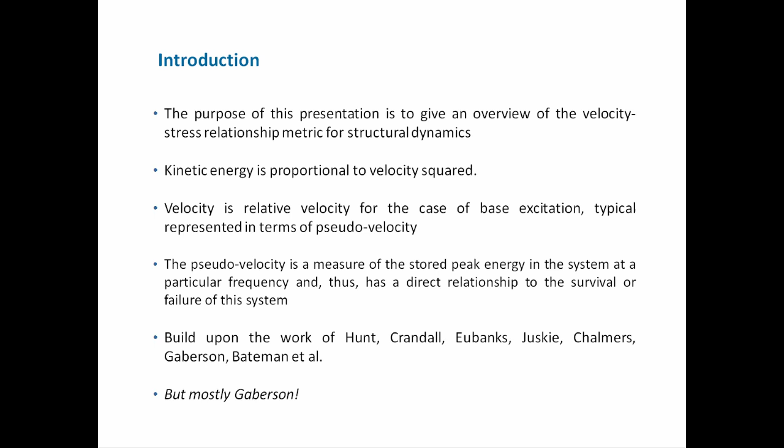This unit builds upon the work of Hunt, Crandall, Eubanks, Juskie, Chalmers, Gaberson, Bateman, and others, but most particularly Gaberson, who was the champion of this method. Here's Dr. Howard Gaberson, who passed away in 2013. I had the privilege of being with him on two different occasions.

He was a shock and vibration specialist with more than 45 years of dynamic experience, and he was with the U.S. Navy Civil Engineering Laboratory and then later with the Facilities Engineering Service Center from 1968 to 2000, mostly conducting dynamics research. Gaberson specialized in shock and vibration signal analysis and published more than 100 papers and articles.

Many of these papers concern the pseudo velocity and how, according to his claims, and they're very good claims, pseudo velocity is the best metric for representing shock response spectrum. He also wrote papers on the stress-velocity relationship.

So here's some of the seminal references. F.V. Hunt wrote 'Stress and Strain Limits on the Attainable Velocity in Mechanical Systems,' published in the Journal of the Acoustical Society of America in 1960. S. Crandall wrote 'Relation Between Stress and Velocity in Resonant Vibration,' also published in the Journal of Acoustical Society of America, in 1962.

And Gaberson and Chalmers wrote a paper called 'Modal Velocity as a Criterion of Shock Severity,' published in the Shock and Vibration Bulletin by the Naval Research Lab in December of 1969. There's also a textbook written by Clough and Penzien called Dynamics of Structures.

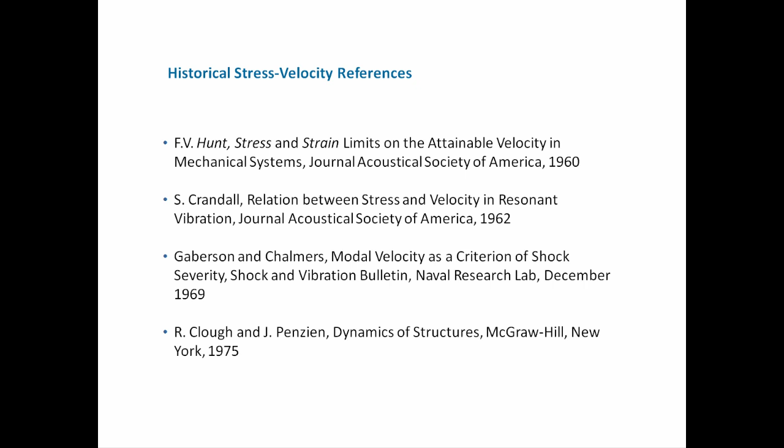Here's an infinite rod, vibrating longitudinally. We're going to consider the longitudinal stress velocity for a traveling wave along this infinite rod. There are various zones where you see dark gray turning into black - that's where compression is taking place. The lighter areas, almost turning into white but not quite, that's rarefaction, where the particles are being spread apart. In this case, the direction of travel is from left to right. There's a well-known relationship between the stress and the velocity for this case.

Sigma is the normal stress, and it's a function of both space and time. That's equal to minus rho c times the velocity at a given space and time. Rho is the mass density, c is the speed of sound in the material, and v, the velocity, is the particle velocity at a given point and also at a given time.

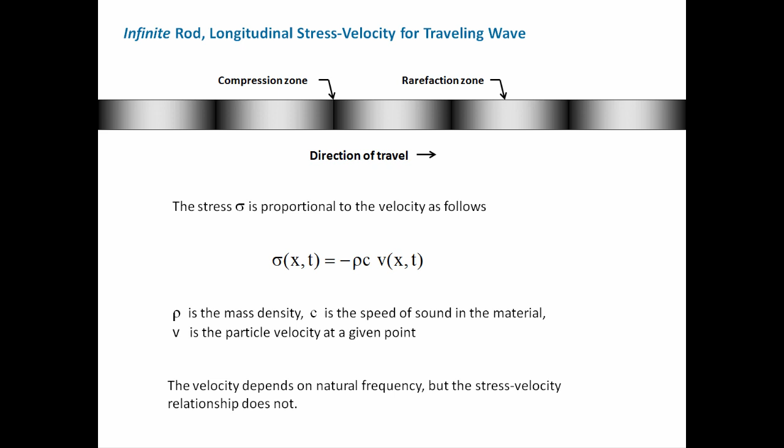One of the reasons this relationship is so attractive is that frequency is not explicitly part of that equation. But of course, if we were to analytically calculate the velocity, we would need to calculate the frequency. Or another way, if we were setting up an experiment, we could experimentally measure velocity. This simple stress velocity relationship becomes the basis of everything we're going to do from here on out. So here's another case.

Again, we have a longitudinal rod, but in this case it's a finite length with fixed boundaries on both the left and right. So the waveform is traveling and being reflected, and potentially those reflections could set up into a standing wave.

And for this case, we have a similar equation to what we've seen before, but slightly modified. In this case, we have sigma sub n, so this is the modal stress. Just for simplicity, let's assume that only the fundamental mode is being excited and that all the stress is in that fundamental mode response.

And when I say excited, we could have the case of zero damping, an undamped system, where there was an initial velocity and initial displacement that set up a resulting waveform at the natural frequency. Or we could have some sort of applied force, even base excitation, driving the system into resonance.

So that normal stress, it is a normal stress, and sub n actually is referring to the mode number rather than normal. The maximum modal stress is equal to rho c times the modal velocity maximum.

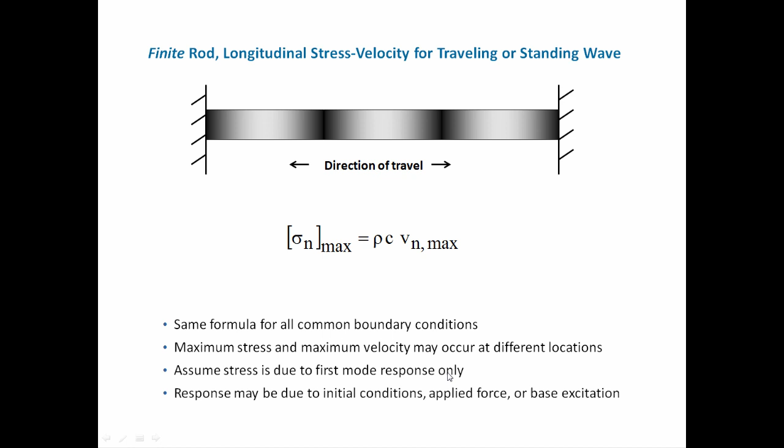Let's just review bullet 3. We're going to assume the stress is due to first mode response only. Later on, we'll consider the case of multi-degree of freedom response.

Okay, so here we have a beam bending, and let's think about the stress-velocity relationship for beam bending. In this case, the maximum bending stress is equal to c hat. Now, c hat is the distance to the neutral axis.

Then we have the square root of the elastic modulus, E. A is the cross-section area, rho is the mass per volume, and I is the area moment of inertia. So effectively, these terms together equal a constant, and that constant depends on geometry and material properties.

So the maximum bending stress then is equal to this composite constant times the maximum modal velocity. And again, the maximum stress and maximum modal velocity may occur at different points.

And for right now, we're still being simple and assuming that the stress is due to the first mode only. In other words, the response of the beam, even though it's a continuous system, is just in its first mode, its first bending mode.

And this formula will work for a variety of different excitation sources, including initial conditions like initial displacement, initial velocity, or applied force or base excitation.

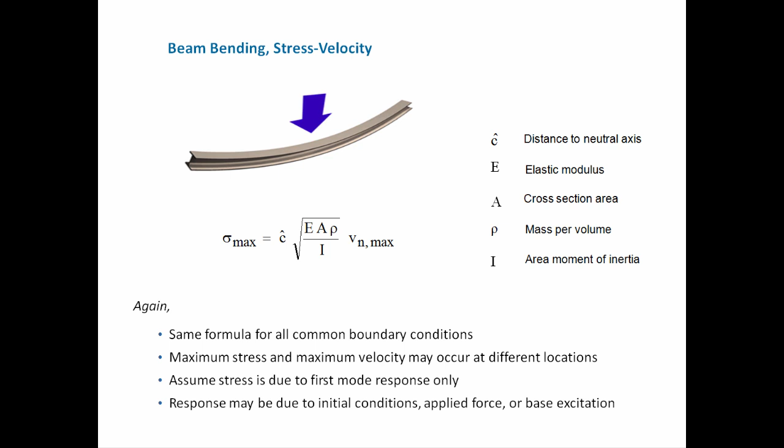Plates are more complicated, and actually in an upcoming unit we're going to go over a kind of a simplified way of analyzing the plate bending stress-velocity relationship.

But going back to the seminal 1960 paper by Hunt, he wrote: 'It is relatively more difficult to establish equally general relationships between antinodal velocity and extensional strain for a thin plate vibrating transversely, owing to the more complex boundary conditions and the Poisson coupling between the principal stresses.' But he did come up with a formula for higher modes for an intermodal segment.

So imagine there are a series of nodal lines sort of crisscrossing this rectangular plate, and he came up with a formula where, for some higher mode where there's just a patch between these nodal lines, we can come up with a formula for the stress and velocity relationship for that patch.

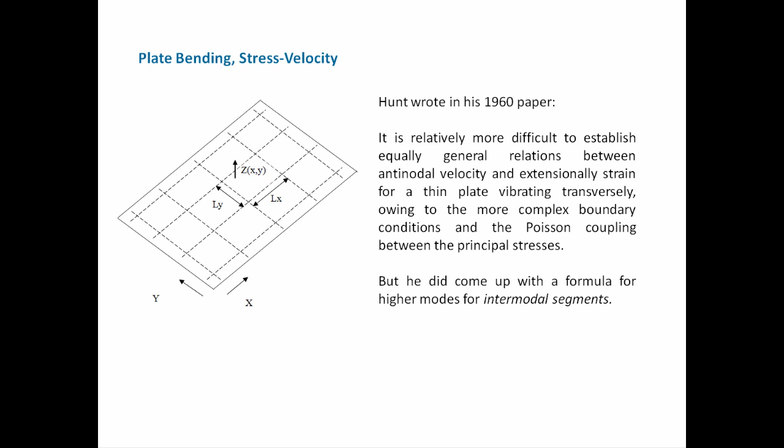And we'll maybe talk about that more later, but actually we're going to use a simpler method. I just wanted to mention this because it's in Hunt's 1960 paper.

So we can generalize this into a formula here where we have the maximum stress for modes, and the sub-n refers to the mode number, is equal to K. Now K is a constant of proportionality. We'll talk about that here shortly.

Rho C—by the way, I think rho C has some other names. I think it's sometimes called the specific impedance or the acoustic impedance, and you can fact check me on that. And then we have the maximum modal velocity, V sub n.

So this K factor here, now let's consider we have some complex structure. It could be an assembly of plates and beams or cylindrical shells, whatever. This K value, the constant of proportionality which depends on geometry, according to Bateman could vary from 4 to 8.

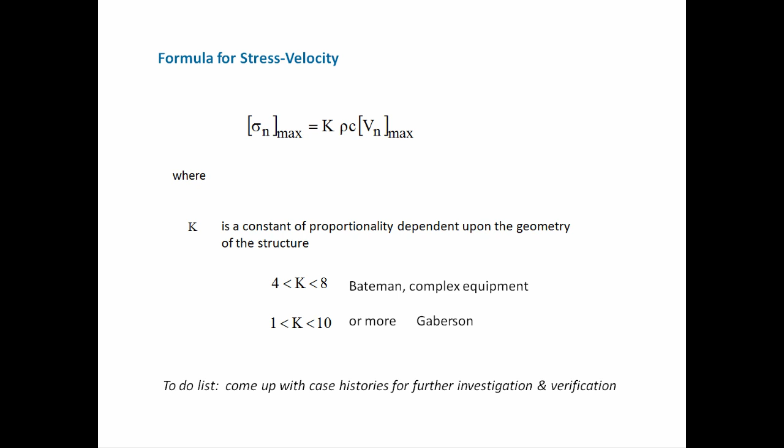And Gaberson was more conservative, and he said that K value can vary from 1 to 10. I have a note to self, a to-do list, to come up with case histories for further investigation and verification. Or if anyone else needs a project, you can go ahead with that and see what you come up with.

We've talked about Mil Standard 810E before. Now, I realize Mil Standard 810 has been revised to Rev F and G, and I think H is in the works. But anyway, going back to Mil Standard 810E, there was an empirical rule of thumb stating that a shock response spectrum is considered severe only if one of its components exceeds the threshold.

The not-to-exceed threshold is 0.8 G per hertz times natural frequency in hertz. This formula should look familiar to you. We've actually covered it before when we were talking about shock response spectrum, and now it's time to revisit that rule of thumb and build upon it.

So let's say, for example, we had 100 hertz natural frequency. That was the natural frequency of our component. The severity threshold would be 80 Gs.

This rule is effectively a velocity criterion, and Mil Standard Rev E stated that it is based on unpublished observations that military quality equipment does not tend to exhibit shock failures below a shock response spectrum velocity of 100 inches per second. Well, if you actually work through the mathematics of that formula, that actually corresponds to 50 inches per second. So there's a built-in 6 dB margin of conservatism.

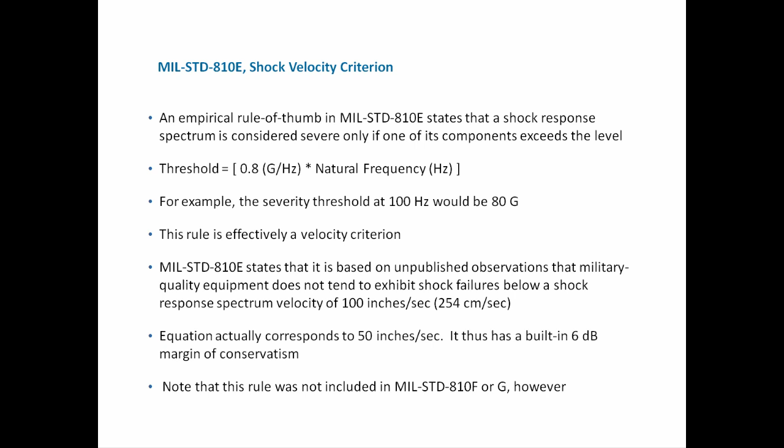Another, probably a little better way, or maybe I should say just a supplementary way, is to see whether the random vibration environment is high enough to cover your SRS shock requirement. We'll talk about how to do that in an upcoming webinar.

So imagine you have to take 2 cylinders and connect them together. These could be modules in a launch vehicle, and there's a joint between those 2 cylinders, and the V-band clamps that joint down so the 2 cylinders are fastened one to another. This would be like in a launch vehicle.

So during the portion of flight when it's time to separate the 2 modules one from another, there might be some cartridges. These cartridges have a little pyrotechnic charge inside, and the charge is set off, and it drives a guillotine blade, and the guillotine blade cuts the bolt that connects the clamps together.

And when I say that, there could be several bolts at a given azimuth or clocking angle, as well as between other segments as well. So there could be 2 or 3 or 4 bolts, whatever, cut in order to have the V-band release.

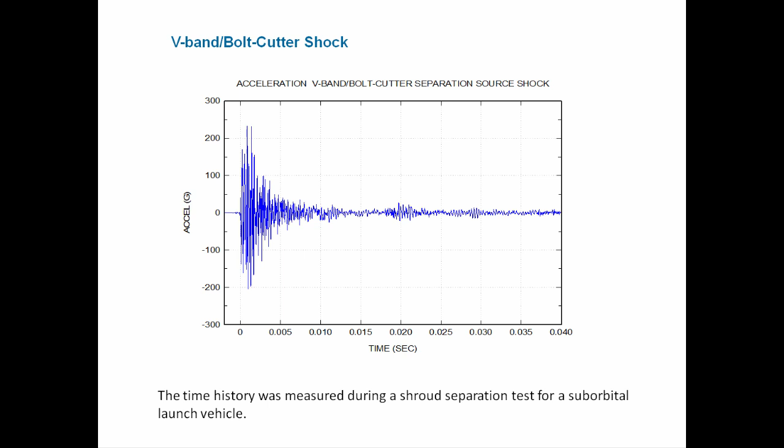Now pseudo velocity is a slightly fuzzy term. So when we say pseudo velocity, it's sort of the approximate relative velocity. But let's just remember, when we use pseudo velocity, we're engineers. We're not physicists.

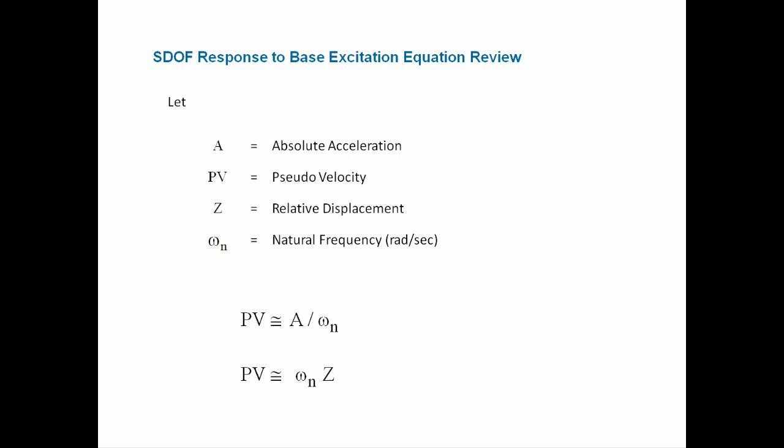But let's look at the peak velocity. Well, the peak velocity is within about 12 inches per second, and 12 inches per second is well below the conservative 50 inch per second threshold via that empirical formula we took a look at earlier. So this V-band bolt cutter shock is really not so severe after all.

Having said that, though, when in doubt, test.

Another thing to look at is that certainly the pseudo velocity varies with natural frequency, that's clear. But the dynamic range - that's the ratio between the maximum peak and the minimum level, we could call that the dynamic range and maybe represent it in terms of dB - in many cases, not all, the dynamic range of the pseudo velocity is less than the dynamic range of acceleration.

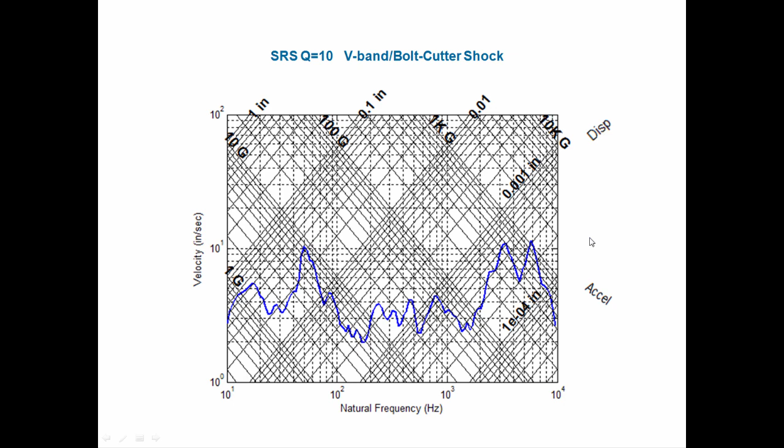So if we look at acceleration for this acceleration time history, it takes about 3 or 4 decades to represent the acceleration SRS. And if we turn our heads 45 degrees counterclockwise, we'll see it also takes 3 or 4 decades to represent the relative displacement. But velocity, while certainly not constant with natural frequency, is more stable with natural frequency than either relative displacement or absolute acceleration. That's another feature that makes the pseudo velocity an attractive metric for characterizing the damage potential of shock.

So the parachutes helped mitigate the water impact shock. And it turns out that within these solid rocket boosters there were some avionics components. Those avionics components were likewise recovered, refurbished, retested, and then they were flown again. So we have some actual data, and this is from a Space Shuttle solid rocket booster water impact.

Let me back up a little bit. When these solid rocket boosters were undergoing their water impact, there was obviously a variety of variables that would affect that shock: the wind, the sea state, the wave height, the angle at which that booster struck the surface of the ocean. Those were all variables.

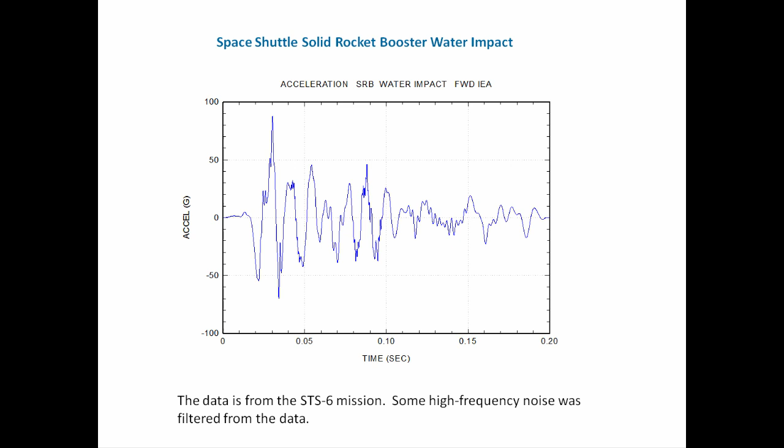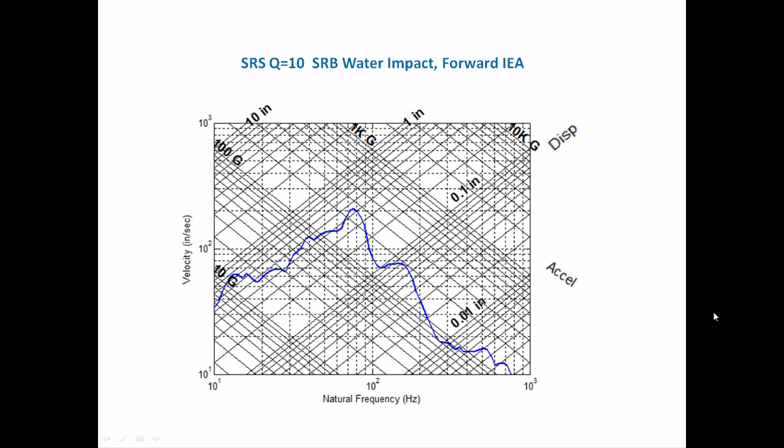According to Mil Standard 810E rule, depending on whether we consider 50 or 100 inches per second to be the threshold, for the 100 inches per second case we're about 6 dB higher, and for the 50 inches per second case we're 12 dB higher. So this was a severe shock event, and the effect on that avionics box needs to be considered accordingly, especially since it's going to be reflown on an upcoming mission.

Just to back up a little bit, I think we've talked about these types of thrust oscillations before, but basically the combustion cavity of the motor is a hollow space, and in some cases it can act like an organ pipe. Standing pressure waves can set up in that internal cavity geometry as driven by vortex shedding and other effects. Some solid rocket motors have very prominent thrust oscillations, and others don't. Who knows why some do and some don't? I don't know.

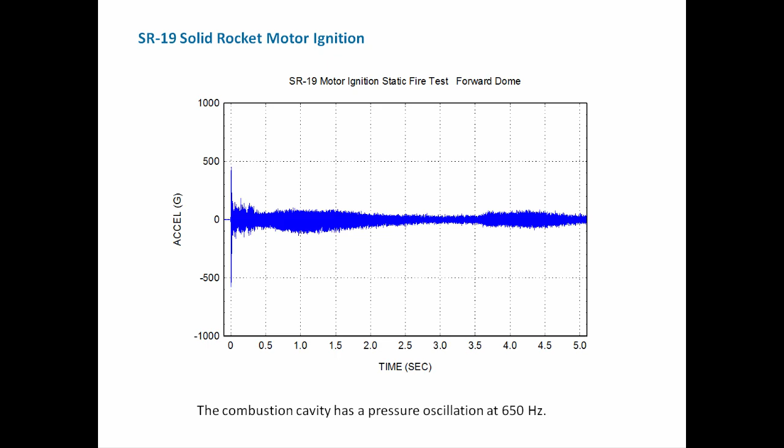But here's the tripartite SRS, Q equal to 10, for the SR-19 motor ignition as measured on the forward dome. We have velocity in inches per second and natural frequency in hertz, and this peak gets up to about 300 inches per second, which is clearly a severe shock event.

So the moral of this story is please do not mount any components on the forward dome of an SR-19 solid rocket motor. But if it is absolutely necessary to do so, then maybe isolators should be used so that the natural frequency of the isolated system is well below 650 hertz. When we isolate components, their natural frequencies might be down in the 20 to 40 hertz region.

Okay, here's a reentry vehicle separation linear shape charge. We've actually looked at this data before when we were doing our SRS analysis, or our SRS webinar for pyrotechnic shock. Here we have peaks getting up to about plus and minus 5,000 G. Again, this was a near-field pyrotechnic shock measured in flight on an unnamed suborbital rocket vehicle.

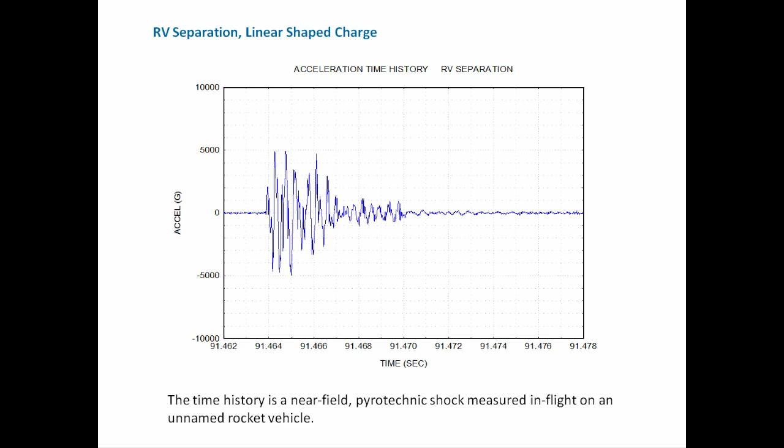As we take the tripartite SRS of that particular shock, we have velocity in inches per second versus natural frequency in hertz. This velocity here is, let's see, we've got 100, 200, 300, 400 - this is over 500 inches per second. So clearly a very severe event.

So the moral of this story is please do not mount avionics components anywhere near that RV separation plane. But if it becomes absolutely necessary to do so, please use isolators.

Okay, we've talked about the El Centro or Imperial Valley earthquake of 1940. The magnitude was 7.1, and it was the first quake for which good strong motion engineering data was measured. Obviously this earthquake was severe enough to cause widespread structural damage, and tragically there were also some fatalities. So we've looked at this data before - this is the acceleration time history for the El Centro earthquake in 1940, and this is the north-south component that was parallel to the ground.

And this is the acceleration time history. It only gets up to about 0.3 of a G, so much less acceleration than for, say, the RV separation shock. But of course the duration is different and the frequency content is different between those two types of shock.

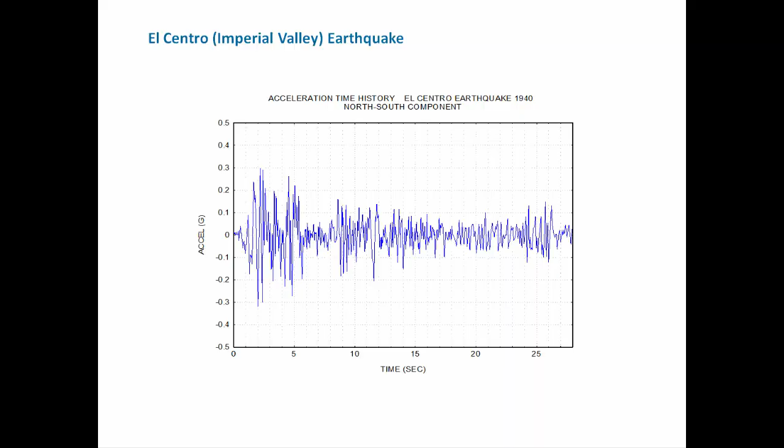So if we take a tripartite SRS, Q equal to 10 for that El Centro earthquake, this is the north-south component. We have velocity in inches per second and natural frequency in hertz.

And this is getting up to about 30 inches per second. Now according to Mil Standard 810E, that's no problem to be at 30 inches per second, but Mil Standard 810E is referring to small equipment like avionics boxes or radios, much smaller systems. But when we evaluate severity for an earthquake, we're concerned about how a building would respond, and the velocity threshold criteria are different for the case of a building or a nuclear power plant or so on.

Here's a half sine pulse. SRS Q is equal to 10, so it's a half sine pulse, 10G 11 millisecond, and we're looking at the tripartite SRS. The velocity in inches per second gets up to 25 inches per second, and then we have, of course, natural frequency along the x-axis.

Okay, let's summarize what we've taken a look at here, and I'm actually going to add one. So these are the maximum velocities and dynamic ranges of shock events. Now when I say dynamic range, let me just review. So we take the peak velocity, the maximum velocity along the SRS, and then we also take the minimum SRS velocity, and we make a scale factor between those two values. The formula would be the delta dB equals 20 times log base 10 of the ratio of the maximum to minimum SRS velocity values. So that's dynamic range. And here's the maximum pseudo velocity.

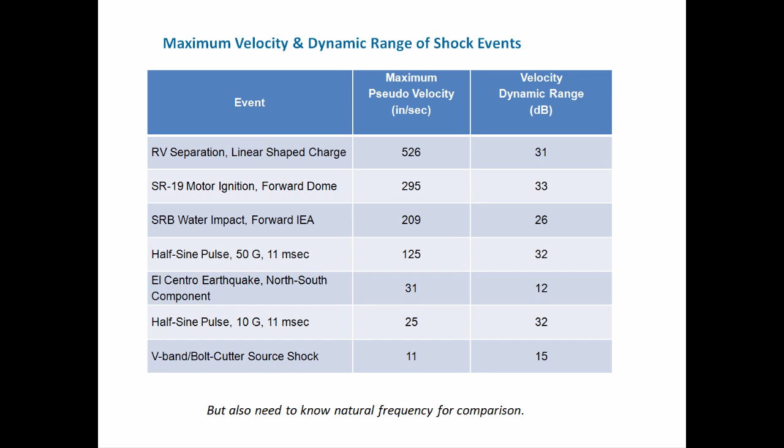But otherwise, that V-band bolt cutter source shock was actually fairly benign at one extreme, and at the other extreme, the RV separation event was extraordinarily severe. Now really, to make a more detailed comparison, we also have to know the natural frequency of our test article. This is just reducing those SRS plots to a single value, for convenience, for rough comparison. But let's go back to the SR-19 ignition shock, for example. Certainly this 300 inches per second is severe, but if the natural frequency of that component is, say, around 100 hertz or so, then the pseudo velocity would only be around 50 inches per second. Not quite as bad, but just for ranking these events in terms of a single value, we would rank them in terms of the peak pseudo velocity.